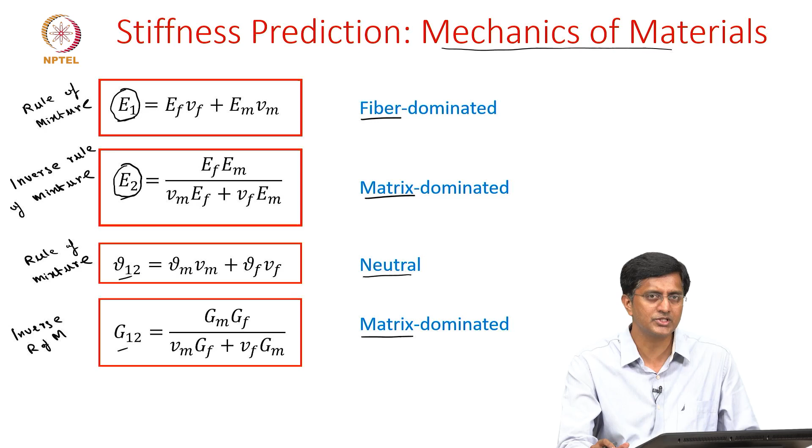So this is what we have seen with the mechanics of materials approach, but there are other approaches also to do these stiffness predictions. Mainly the elasticity approach, where we rigorously apply the equilibrium equations, compatibility equations and the stress strain relations to find the stiffness E1, E2, the Poisson ratio and the shear modulus. Because of the limitations of time, we are not going into those specific models, but in summary what we notice from this approach is usually these equations or curves are very complicated. These are not simple equations which can readily be used when designing. And the second disadvantage is they are restricted to small design regime.

What it means is those equations or curves which we derive using this approach are usually limited to a certain volume fraction or a certain kind of fiber. Either it could be the shape of the fiber or the distribution of the fibers. So though it is a very exact approach which is more accurate, because of these complexities involved, it is not very useful in design.

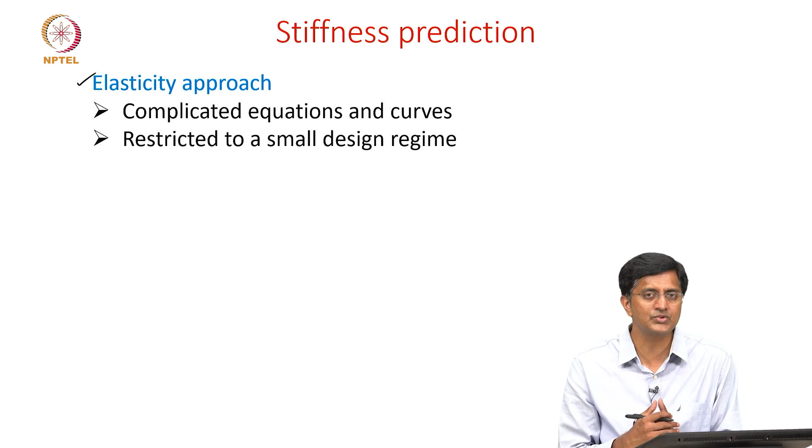So there is another midway where we use the Halpin-Tsai equation. This is a semi-empirical approach, meaning these are not directly empirical, meaning from experience. These are not just curve fitting, but we use the knowledge we have gained from the elasticity approach and then simplify those equations by doing a bit of curve fitting. So we use both the analytical approach as well as the curve fitting to come up with these Halpin-Tsai equations.

As I'm mentioning, the reason why these Halpin-Tsai equations are very commonly used in industry is because they are simple and ready to use in the design, and these are actually a generalization of the micromechanics equations. So these equations are inspired from the elasticity approach, where we derive and show the exact equations.

Before we start discussing the Halpin-Tsai equation, there is one more comment I want to make regarding E1 and Poisson ratio nu12. As you can see, we have derived these using the mechanics of materials approach, and in both cases we have the simple rule of mixtures.

So in fact, for both of these, the comparison with the experiments is quite good, which means the simple equations we got here using the mechanics of materials approach are good enough, even when compared with the elasticity approach as well as with the experiments.

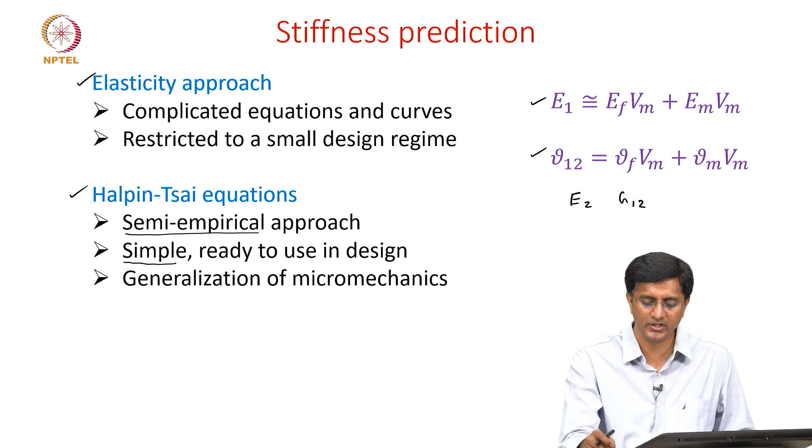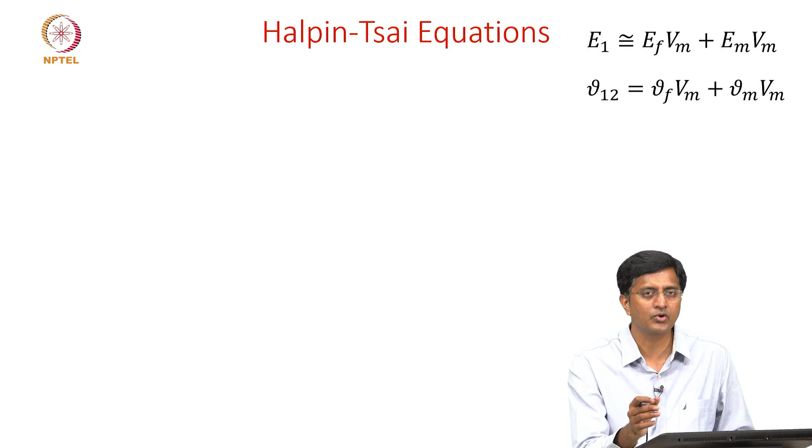So coming to the Halpin-Tsai equations, as you can see, E1 and nu12 are again just repeated from the mechanics of materials approach, so both of them are simple rule of mixtures. But when we discuss G12, the shear modulus, and the transverse elastic modulus E2, we replace these with M to make things common. So whenever I write M here, it could either mean the shear modulus G12 or the transverse elastic modulus E2.

So the relation is the same for both the shear modulus and transverse elastic modulus. And if you look at this equation, it is written in terms of three quantities: xi, eta, and the volume fraction of the fibers Vf. So xi is the measure of the fiber reinforcement.

It depends on various parameters including the fiber geometry, whether the fibers have a circular, square, or rectangular cross section. Depending on this cross section, this xi value changes. It also depends on the packing geometry, meaning when there are multiple fibers, whether they are equally spaced in both X and Y versus differently spaced in X and Y. You could also say whether they are randomly spaced or following a pattern. So depending on the packing geometry, the value of xi also changes.

And lastly, it depends on what kind of loading is applied, meaning this xi value may not be the same for both shear modulus and transverse elastic modulus. So let's say we are talking about a circular cross section, and even the packing geometry is even, meaning the distances in the x and y directions are the same. But whether we are applying a shear load versus a lateral load, this xi can have a different value.

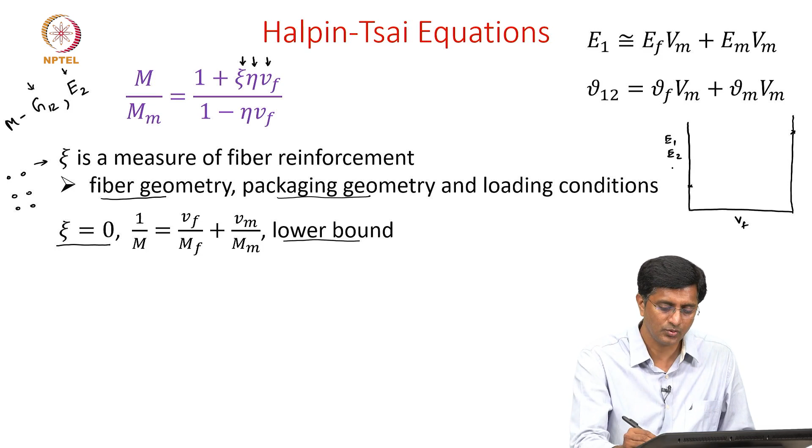It could be E1, E2, the shear modulus, or the Poisson ratio—not exactly for the Poisson ratio, but for the others, because we said Poisson ratio, they are comparable. So if it is a rule of mixtures, the way we draw the curve is as a straight line connecting these two points. And for the inverse rule of mixtures, we said it is a curve with a certain fashion.

So now what we are saying is this inverse rule of mixtures, we are calling it the lower bound. And the upper bound is in fact the rule of mixtures.

So here what we are saying about xi value is when xi is equal to 0, we get to the inverse rule of mixture, which is the lower bound. Let me write it as xi equal to 0. And the upper bound, or the rule of mixture, is when we take xi as infinity.

So these are the two extremes, but in reality the values are in between 0 and infinity. So it could be some curve somewhere in between. Since there are infinite curves between the lower bound and the upper bound, the exact curve will depend on the value of xi.

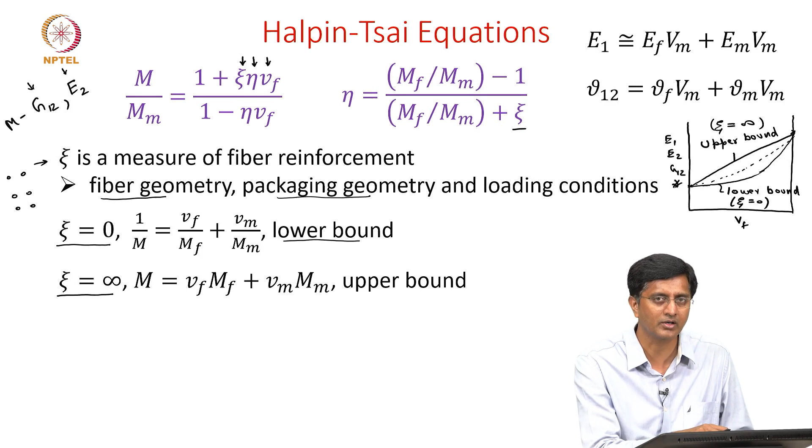Eta also has some physical significance. These values range from: for rigid inclusions, the value is 1. For homogeneous materials, the value is 0. And for voids, it can be written in terms of xi, minus 1 by xi.

With this, we conclude this topic of the Halpin-Tsai equations, where we have shown these simple equations to predict the stiffness properties of the lamina.

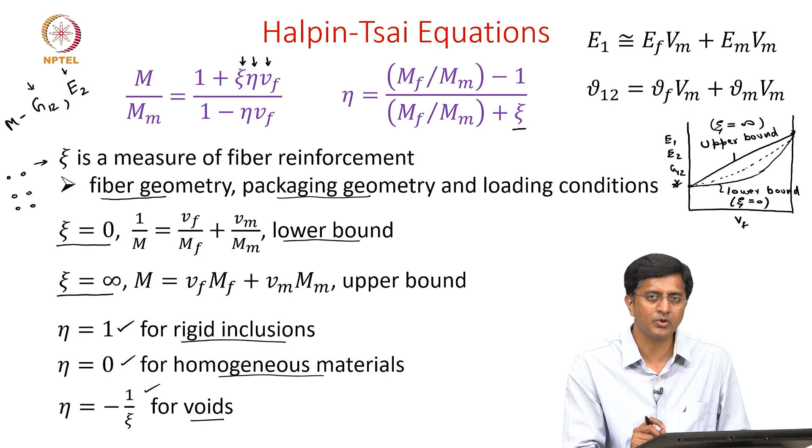Now that we have looked into a few topics on stiffness prediction, we'll start discussing strength prediction. Before we begin, we should be clear that our understanding of stiffness is much greater than our understanding of failure. This is true not just for composites, but also for regular metals or other materials. The models we'll discuss are very preliminary, and much work needs to be done before we can come up with models totally based on fundamental concepts. So with this brief introduction, let's see what our understanding of strength prediction is.

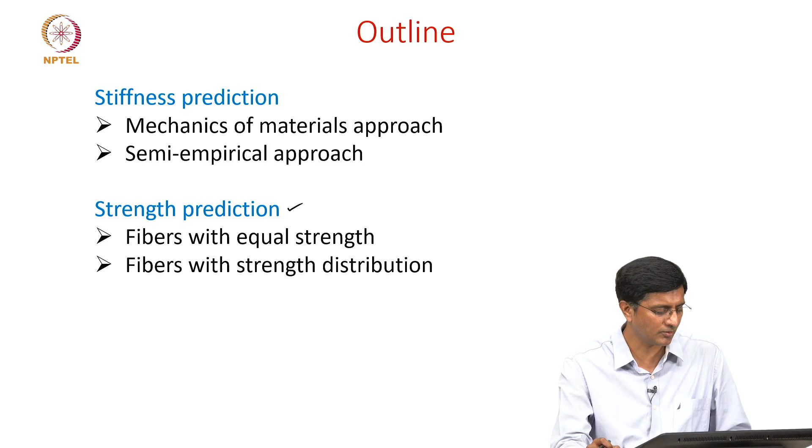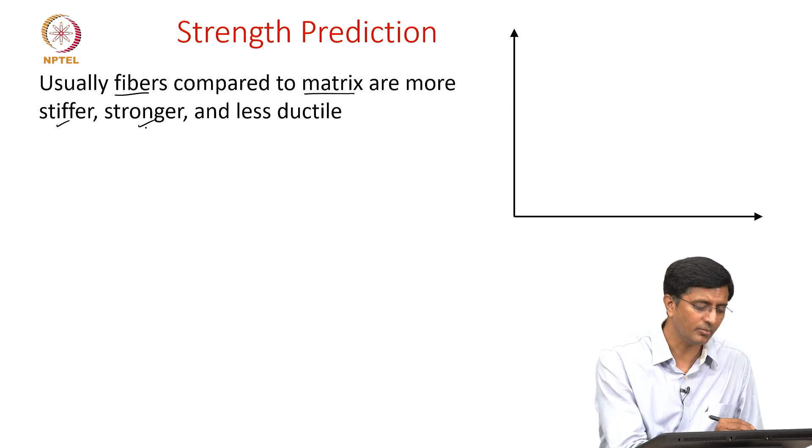First, let's comment on the fibers and the matrix. Usually fibers are much stiffer and stronger compared to the matrix materials, and usually less ductile than the matrix. Most often fibers are brittle, like glass fibers, which are very brittle compared to the matrix material, say epoxy, which is more ductile than the fibers. As we've discussed, fibers are much stiffer and stronger - that's the reason we reinforce matrix materials with fibers.

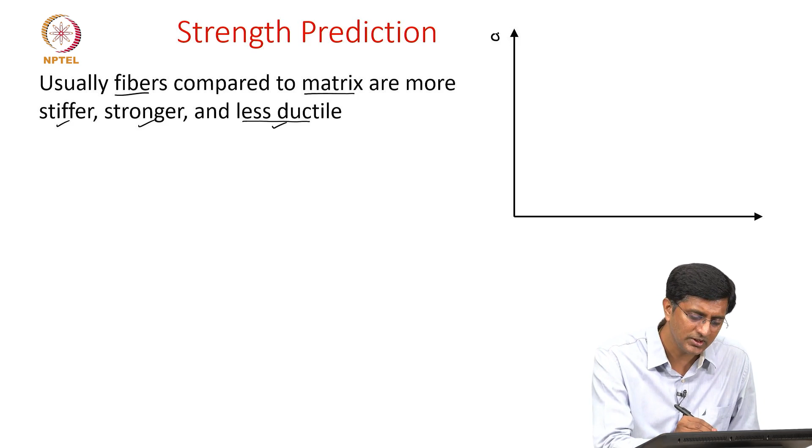Now let's see how the stress-strain response is for a fiber and for a matrix. Starting with the matrix material: at small strains it is usually linear, but after that it goes into the plastic region. For fibers, usually these are stiffer, so the slope will be high. But after a particular amount of stress and strain, they also change to plastic behavior. So there is a region where they are linear elastic, and then they go into plastic behavior.

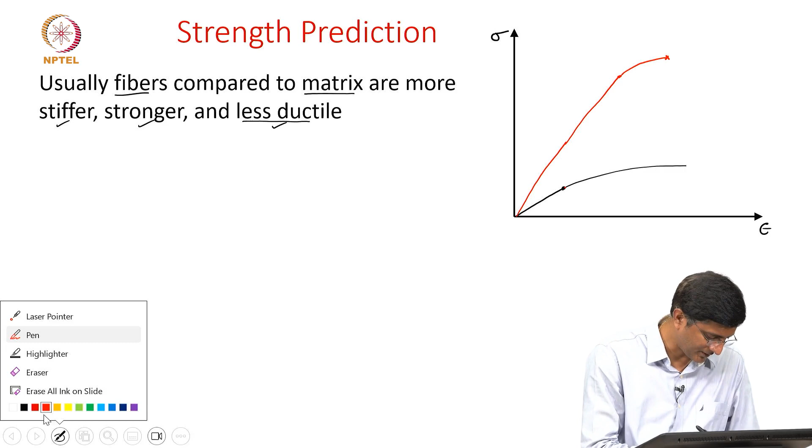Let's also show where these fibers fail and where the matrix fails. So though it's not to scale, basically what we're trying to show is the fibers fail first, and then the matrix, because the matrix is usually more ductile - it can take much more strain.

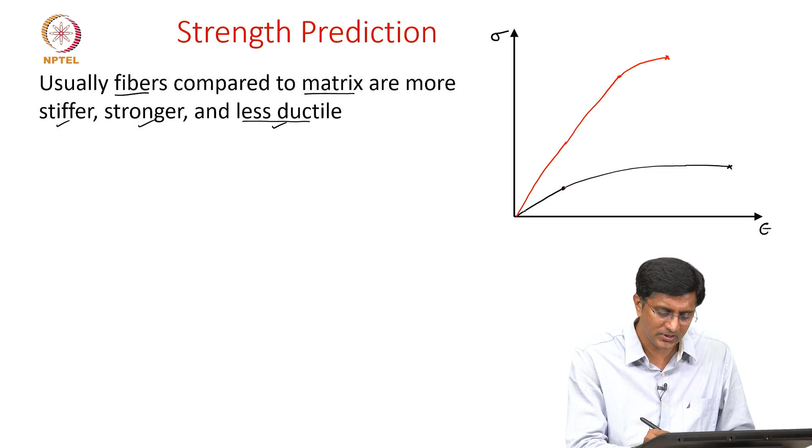So once we've seen that both the fiber and matrix have linear elastic behavior at the beginning and then come to plastic behavior - these are not true for all materials, because you can always find fibers where there is only linear elastic behavior with no plastic behavior. But what we're trying to show here is more general, which can be applied for any kind of fiber or any type of matrix material.

If this is the case, usually the composite behavior will be in between the matrix curve and the fiber curve. For the composite, since both fiber and matrix are initially linear, the composite also will be linear until the matrix starts going into plastic - that's when even the composite transitions into the plastic region. Let me note that this is for the composite.

So looking at this plot, we should be able to see that there are different regions. If you're looking from zero strain to the strain at which the matrix transforms from linear to plastic, let's say this is stage 1.

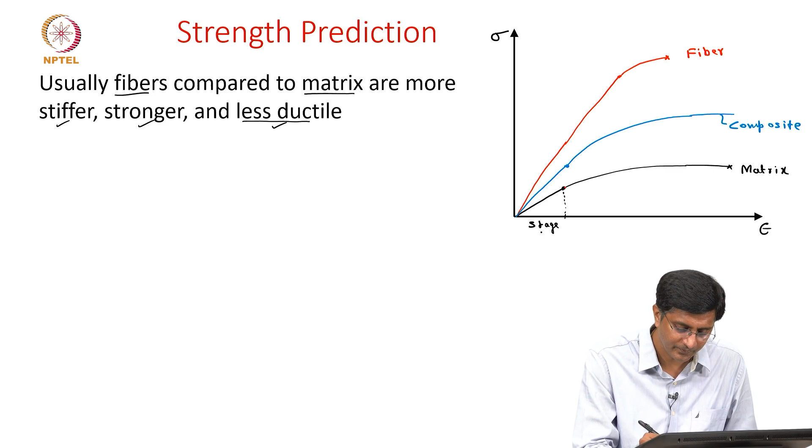So here we look into, as we are loading a unidirectional composite, we get to stage 1 at small strains. In this stage 1, we see both the fiber and the matrix deform elastically.

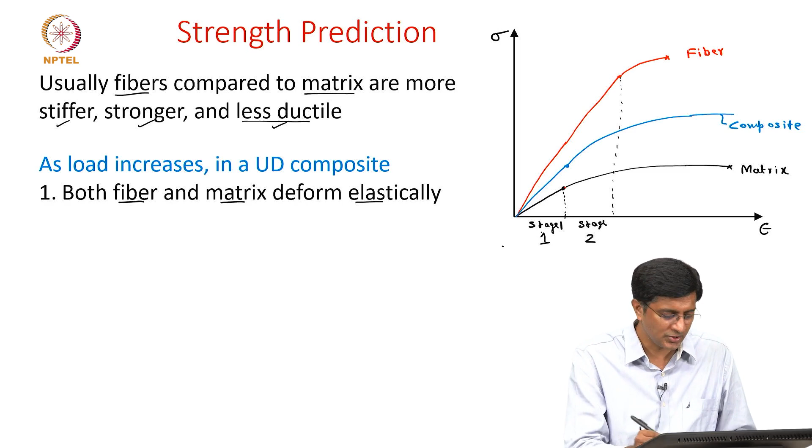But if we continue loading, what happens? Now the matrix goes from elastic to plastic region, whereas the fiber continues in the elastic region. Let's say this is stage 2, and this is stage 1. So in stage 2, the fiber deforms elastically, whereas the matrix deforms plastically.

But if we keep loading, then we move into stage 3, until the fiber fails, because the fiber is the one which fails first if we are considering strain as the failure criteria. And if we continue to load, then if the matrix is able to sustain the load, we go into stage 4.

So stage 3 is both fiber and matrix deforming plastically, and stage 4 is fiber fracture followed by composite failure.

The reason we are looking at this plot and trying to distinguish stages is because when applying our mechanics to predict strength, we need to know whether the material is behaving elastically or plastically. That's where, once we know that, we can change our approach to predict failure. Since this is an introductory course, we'll only focus on stage 1, where both fiber and matrix are linear, and use this approach to predict failure.

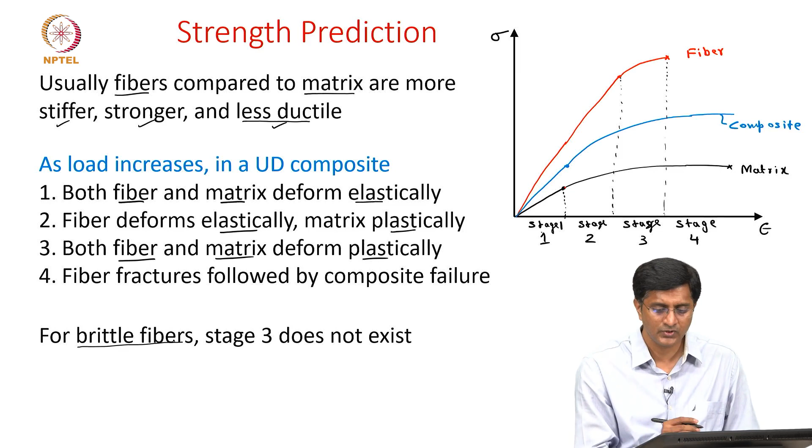So let's make a few observations. What happens with brittle fibers? We already mentioned brittle fibers only have this elastic region and don't have a plastic region. So stage 3 does not exist, because in stage 3 the fiber should show plastic behavior, which is only possible with ductile fibers, but not with brittle fibers.

Now with a brittle matrix, the matrix material fails at this point, meaning we don't have stages 2 and 3 where the matrix is plastically deformed. So both stages 2 and 3 do not exist for a brittle matrix.

So this is a more generalized way of looking at failure in the composite, depending on whether the fiber is brittle or ductile versus the matrix is brittle or ductile. We can look into special cases from this generalized plot.

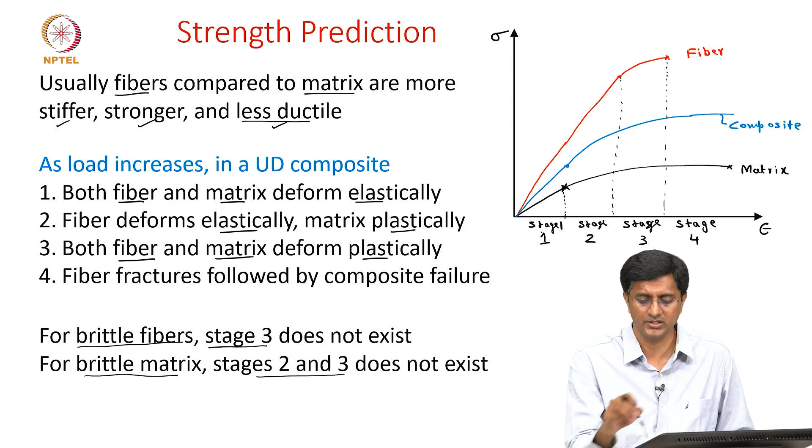Now that we have started discussing failure in a composite, we will look into a model to predict the failure. In this model, we assume that all fibers fail instantaneously, meaning we are saying all fibers have equal strength.

Now the question is, is this a realistic assumption or not? The answer is no. Usually it's not possible that all fibers will fail instantaneously, but we make this assumption to simplify the analysis. Later we will come back and see what if this assumption is not true, and what other approaches we have to follow. But for now, let's assume all fibers fail at the same strength, and limit our analysis to brittle materials. Let's say both matrix and fiber are brittle, and we also limit our analysis to linear elastic materials, meaning both the fiber and matrix will only consider linear elastic behavior.

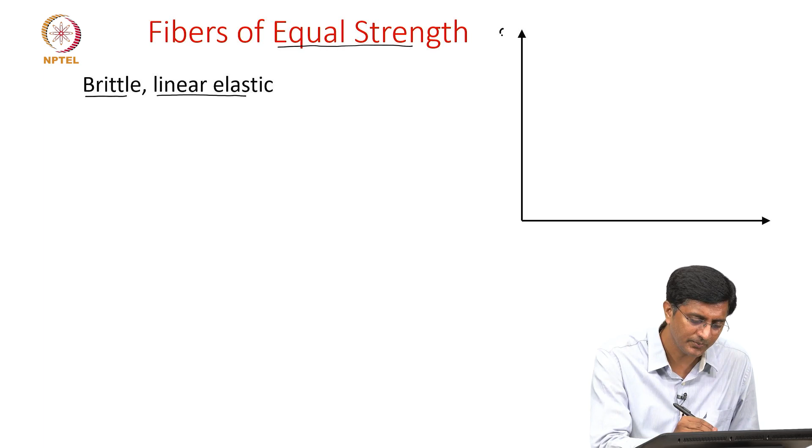So let's plot the stress-strain relation for the fiber and the matrix. We'll start with the matrix material. It's a straight line since we are assuming it to be linear elastic.

This is the point of failure which has a corresponding strain, which we'll write as epsilon matrix max, meaning it is the maximum strain the matrix can take before failure, and the corresponding stress we'll write as sigma m max. So this is the stress at which this matrix material will fail.

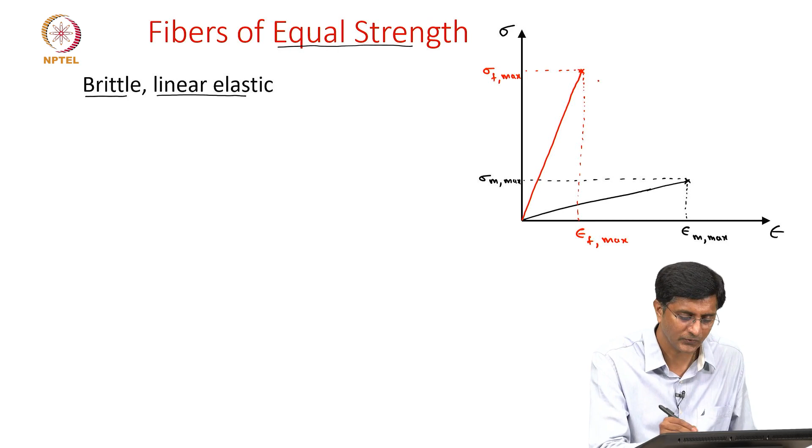Now let's do the same for fiber. Here too we'll note the strain at which it fails, which we'll write as epsilon f max, and the corresponding stress we will write as sigma f max. So of course this is the fiber, and this is our matrix.

Now that we have seen the stress-strain response for the matrix and the fiber, the question is, for the composite, how will the response look like? Since both the matrix and fiber are linear elastic, even for the composite we will get a linear elastic relation. But when will that composite fail?

If I ask, how can we respond? Let's say we are following maximum strain as the failure criteria. So the composite will fail when it reaches the first failure strain, which is the fiber strain. Let's say we are talking about some intermediate volume fractions, then the composite response should be something like this.

Okay, here I want to make one important point. We should think about this composite because it has a volume fraction Vf. What is the range of Vf? It can go from 0 to 1.

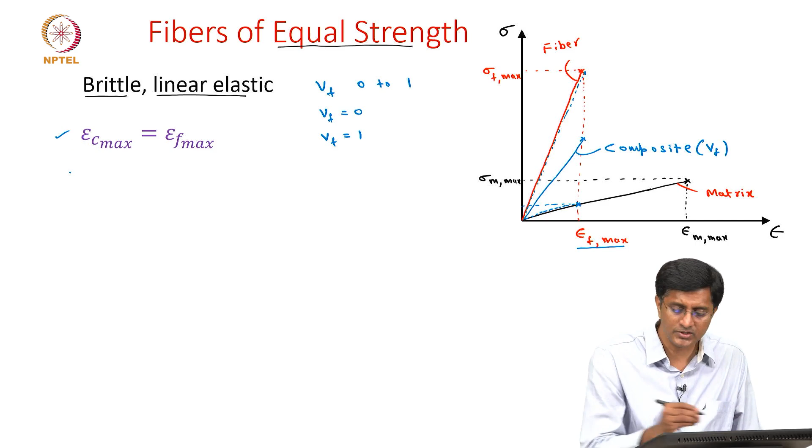We can write the corresponding stress in the composite as a simple rule of mixture kind of equation, where we write in terms of stresses in the fiber times the volume fraction in the fiber, and stresses in the matrix times volume fraction of the matrix. See, 1 minus Vf we already know it's simply the volume fraction of the matrix material.

So if we look at this point, we notice that these are the stresses in the matrix corresponding to the strain epsilon F max. So the same stress is shown here.

So in summary, what we have seen till now is we are able to give an equation for this composite. So the stresses in the composite we are able to give in terms of the failure stresses in the fiber and the stresses in the matrix at which it fails. But now there is some important observation to be made.

What is the reason why we use fibers? The reason why we use fibers is so that we can improve the strength of the matrix material. But if you notice, let's talk about volume fraction. If we look at a volume fraction, let's say a curve like this. Let's say this corresponds to one volume fraction Vf.

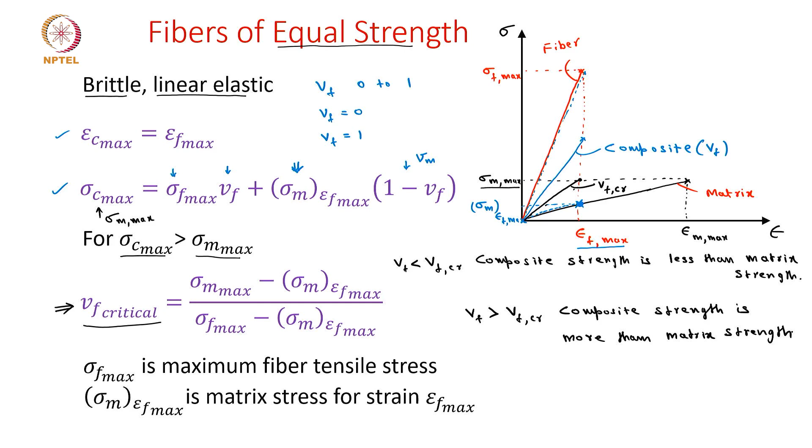There is a better way to represent this, which we'll show in the next slide. Here we have reproduced the main expressions. This is the equation we derived to show what is the failure stress in the composite for a given value of Vf.

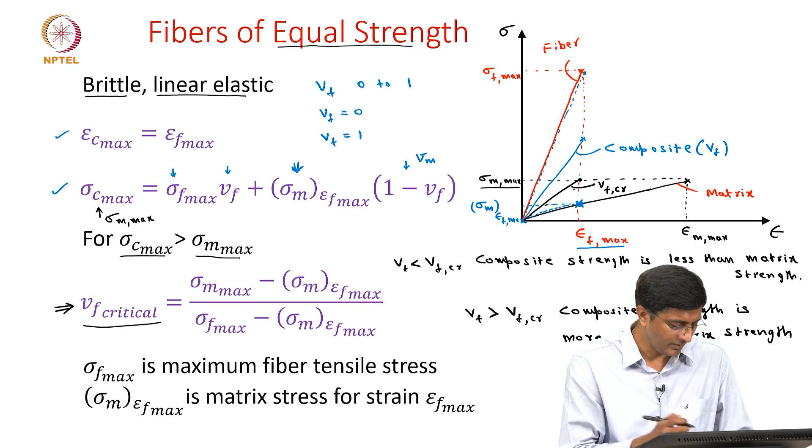Now let's go back to the previous slide where we discussed Vf critical. We are comparing with the failure stress of the matrix. So in this plot, where is the failure stress of the matrix? It is somewhere here, because we have seen the matrix actually fails with slightly more stress.

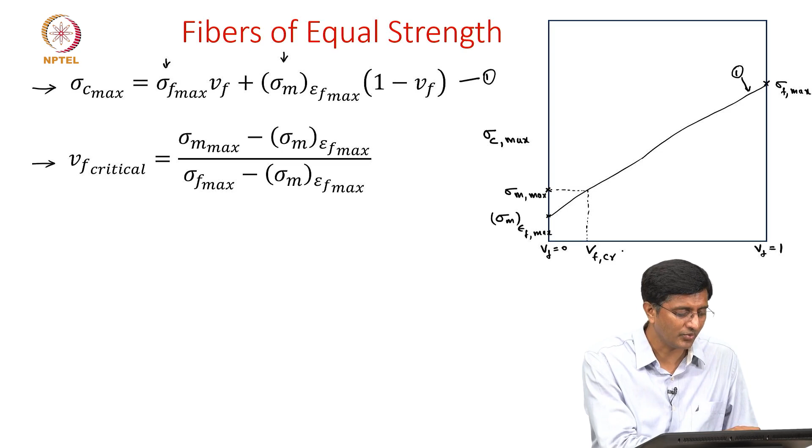And the corresponding volume fraction is the number we're discussing, Vf critical. I hope this is clear. Here we are showing this equation as a straight line, interpolating between the fiber failure strength and the stress in the matrix corresponding to the failure strain of the fiber. And then we've also shown this Vf critical, which we are focusing on.

What happens when there is a very small volume fraction? Let's say we built a composite with only 1 or 2 fibers, which means almost zero or negligible. The moment you load it, these fibers will fail because the matrix is more ductile and takes more strain. How does it accommodate strain? By the fiber failing. So when the fibers fail, since there are too few, it's almost like there are no fibers - almost like a void.

So if we consider the composite response as though there are voids instead of fibers, the relation to write this composite strength is slightly different. There we can write it in this fashion, where we start with the failure strength of the matrix on the left hand, and on the right hand, since it is a void, it should go to 0.

Now let me change the color. So here what are we assuming? That the fibers do not play a role. So this is true when we are working with very low volume fractions.

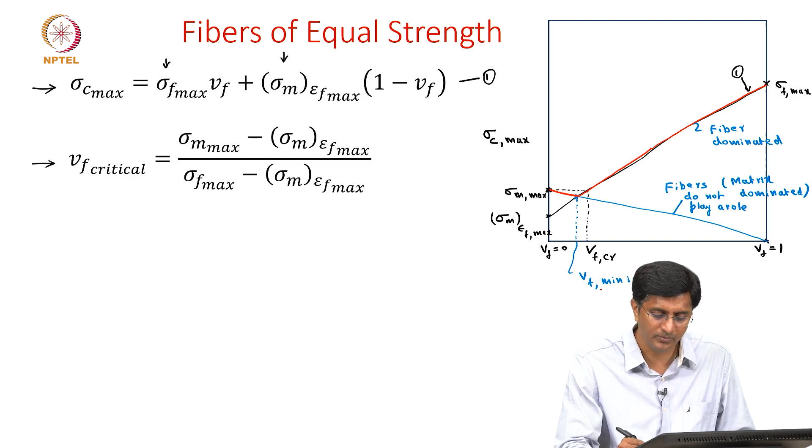So if we look at what happens as we go from volume fraction 0 to 1, initially it is matrix dominated. Beyond this value of Vf minimum, it becomes fiber dominant. The point we're trying to make here is we are introducing this concept of Vf minimum - it tells us whether the composite is matrix dominated or fiber dominant.

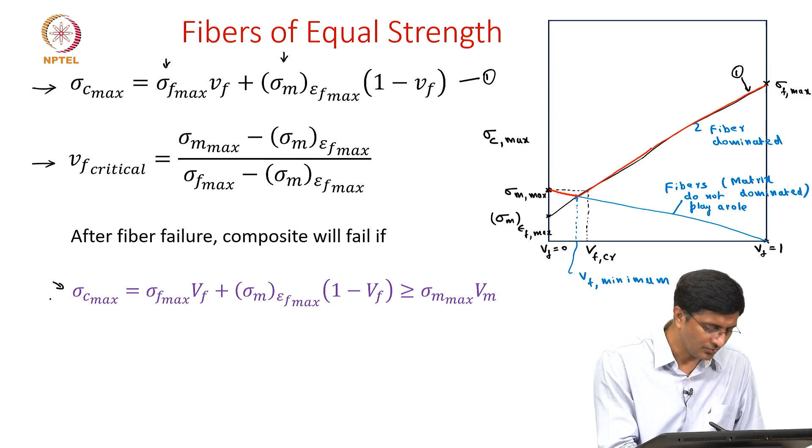So here we are saying after fiber failure, the composite will fail. This is the equation for the blue line, where we consider the fibers as voids because the fibers have already failed and don't take the load.

From this expression we were able to write the expression for Vf minimum. Though I've shown you pictorially, here are the equations to find the actual value of Vf minimum. But let's focus on the meaning of Vf minimum: if your volume fraction is less than Vf minimum, the composite is matrix dominated, whereas when your volume fraction is greater than Vf minimum, it is fiber dominant.

So you may be thinking, why are we interested in critical values like Vf critical and Vf minimum? The answer is, we add fibers to improve the strength of the composite, and our hope is that the fiber plays an important role so that the strength of the composite is more than the properties of the matrix. The Vf minimum ensures that the fibers are really contributing to the strength of the composite, and Vf critical ensures that the failure strength is at least more than the failure strength of the matrix.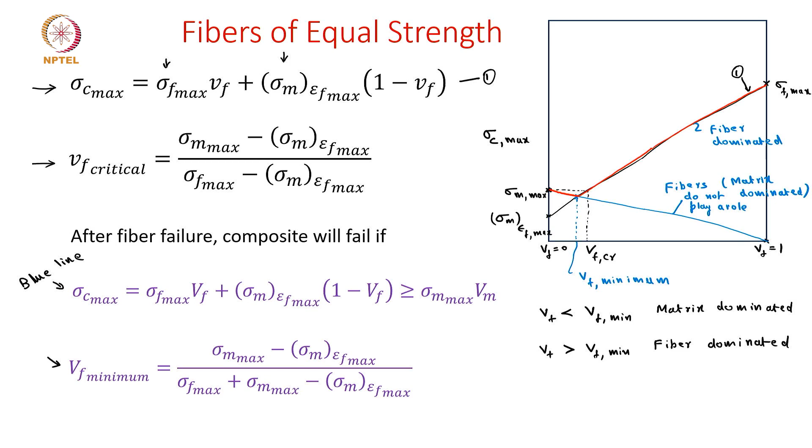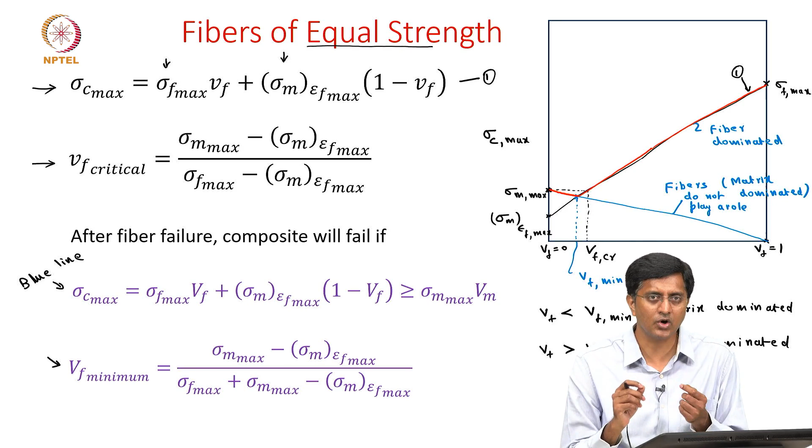I have to repeat that we have done this analysis assuming that fibers are of equal strength, but in reality no two materials are the same. No matter how precisely we control the manufacturing process, there is always a statistical distribution, especially with failure. So let's see how that affects failure and what concepts we need to be aware of. I am not introducing any failure models here, but only a few concepts one should be aware of while working with composites.

So we'll start with fiber length. If there are 10 different fibers, all with different lengths, we know the strength does depend on the length. As we increase the length of the fiber, the strength goes down. Let's say these are experiments done at 5 different lengths, and we notice how the strength value, or the fiber strength, changes.

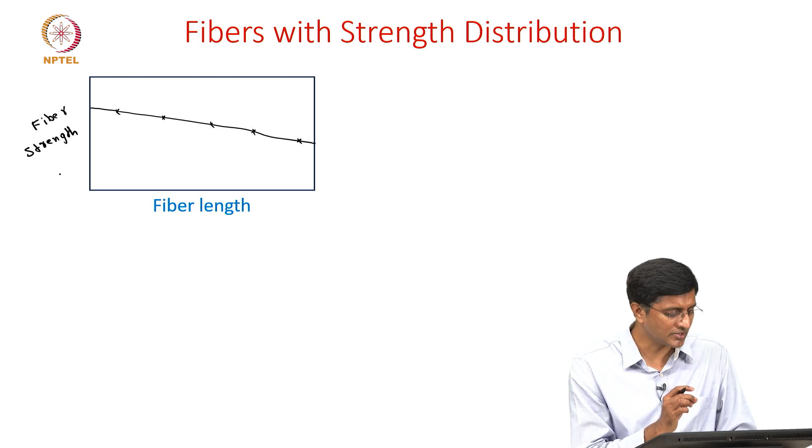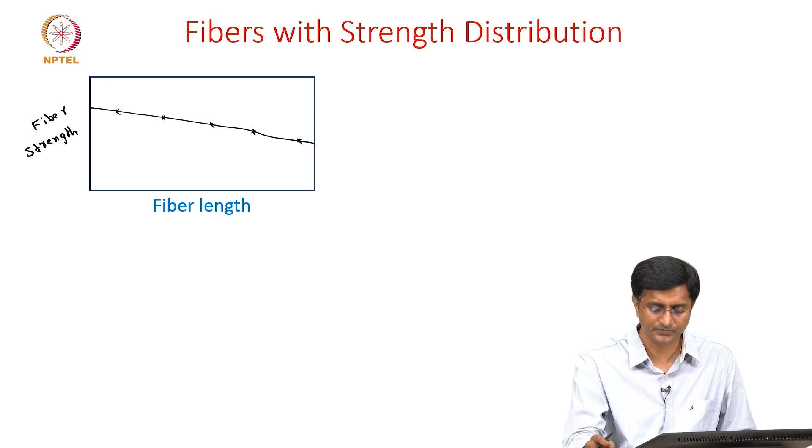Why does the fiber strength decrease with fiber length? The reason is that the greater the length, the greater the chance for flaws in the material. Any material fails at the weakest link, and the weakest link is the flaw. As we increase the length of the fiber, there are more chances to find these flaws. So that's one reason why strength decreases as length increases. This is only one reason to explain the strength distribution, but of course there are other reasons as well.

Now let's consider a lamina with multiple fibers. Let me show a few continuous fibers, with loading in the x direction. But now let's consider that one of the fibers failed, somewhere in the middle. So we are looking at two fibers which are intact, but the fiber in the middle has a failure at the midline.

The idea here is to see how the stresses vary in the fibers and the matrix. First let's look at how stresses vary in the fiber. Since we are applying load in the x direction, wherever there is a failure, the stress is zero. The fiber simply takes the normal stress sigma along the x-axis. So it goes from zero stress, gradually builds up, and after a while comes to a constant value, which is the applied stress sigma x. These are the stresses in the fiber.

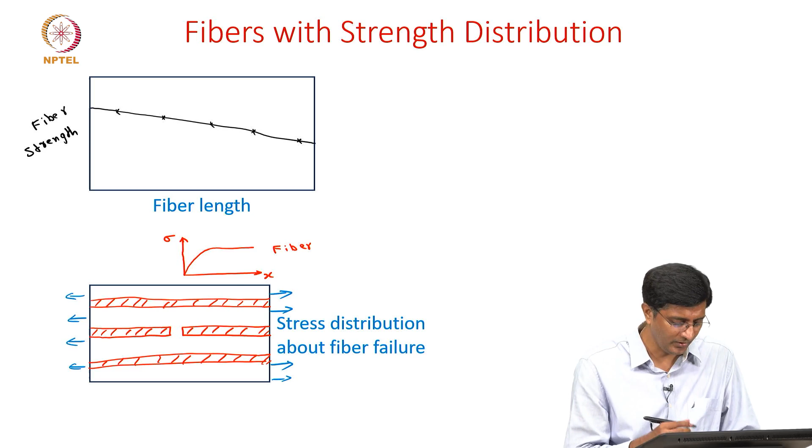But now the question is, how does the matrix respond to the failure? Will it take normal stress or shear stress? In fact, the matrix takes shear stress, because when there is a failure, this shear stress in the matrix transfers the load from one broken end of the fiber to the other. Plotting the shear stress in the matrix along the x-axis, the shear stress is high at the broken point, and as we go along it comes back to zero. So this is the zone where shear stresses are present, but as we go away from the broken area, there are negligible shear stresses in the matrix.

The point I am trying to show here is to give you an idea about when there is a failure in the composite, how the fiber takes the load as well as how the matrix responds to this failure. These are some individual concepts we need to be aware of, about how failure happens and how it affects the stress distribution.

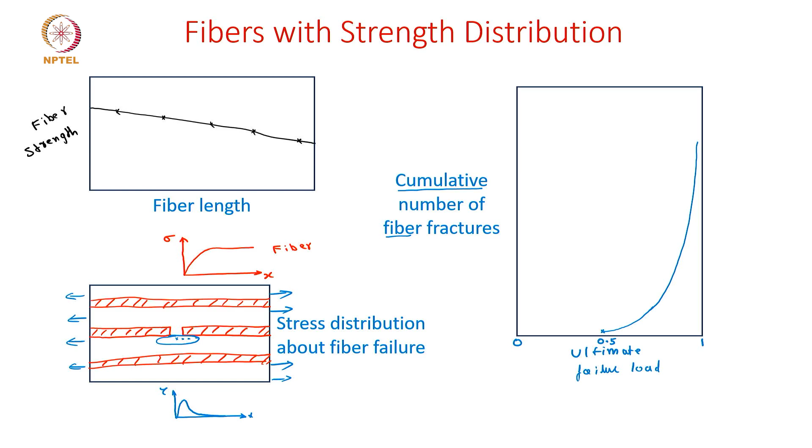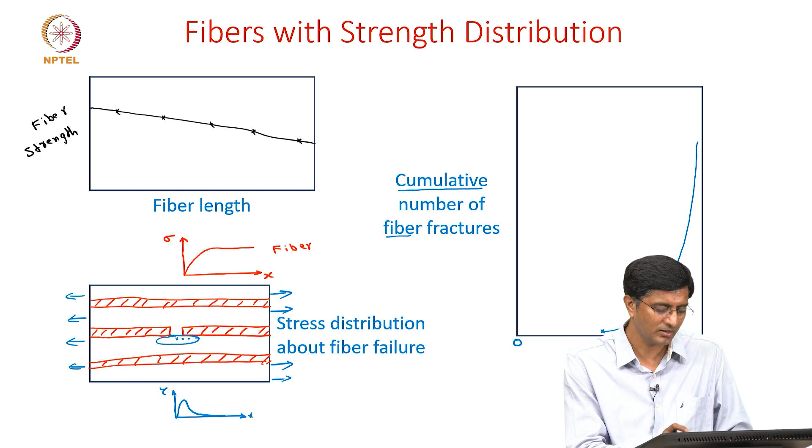With this, we conclude our discussion about failure of lamina. Here we have noticed that there is a strength distribution and how it affects the failure of the composite. So now let's summarize the micromechanics of lamina.

We started with the stiffness prediction using both the mechanics of materials approach and the Halpin-Tsai equations. We also saw a semi-empirical approach. Coming to strength prediction, we identified that there is a strength distribution in the failure of fibers, but we also looked at if all fibers fail instantaneously, meaning they all have the same strength, then how can we predict the strength of the composite?

Later, though we didn't discuss any models for this strength distribution, we did look at different aspects of lamina failure, where we have seen there is a strength distribution. As we increase the length of the fibers, the failure strength decreases. We also looked at how the stress state in the fiber and matrix vary where there is a fiber failure.

And lastly, very importantly, we have seen how the cumulative fibers fail in a composite. Comparing with the ultimate strength of a composite, the first fiber failure happens somewhere at half the ultimate strength, but gradually the number of fiber failures increases, and towards the end it is exponential and fails drastically. This concludes our discussion on the micromechanics of lamina.